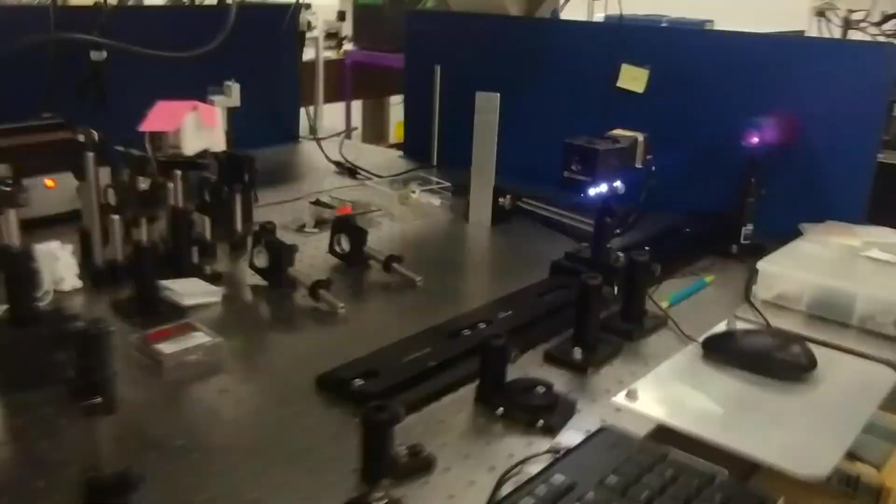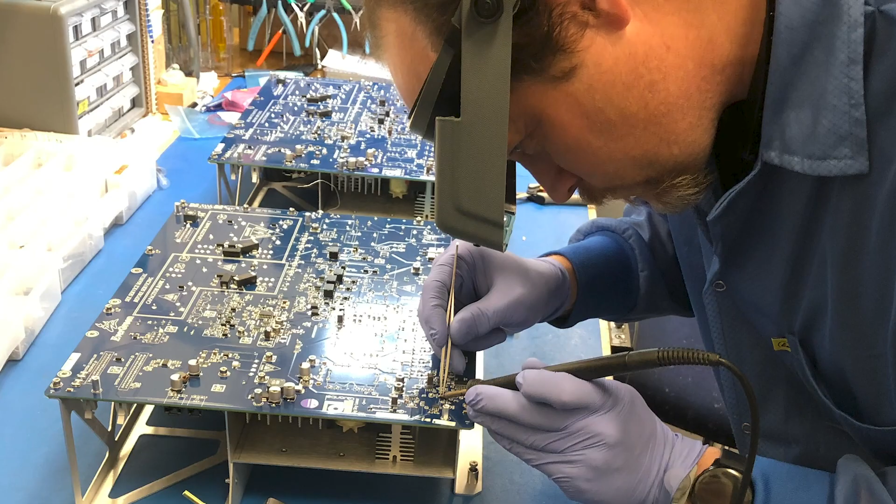I'm Jeremie Waller, senior electrical engineer at Quantel Laser in Bozeman, Montana, part of a global company called Lumibird with many design centers around the world. There are 18 mechanical engineers and about 22 electrical engineers in Lumibird that are part of the Altium 365 environment. It's pretty easy with Altium 365 to expand our environment. We research, develop, and manufacture solid-state laser systems for medical, scientific and defense-related industries.

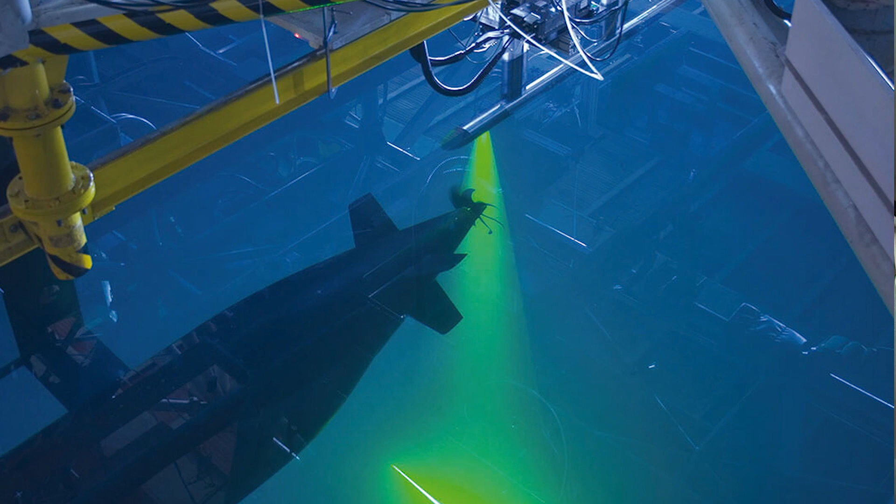Our mantra, I guess, would be we're rugged, reliable laser systems. I'm Laine McNeil, the senior mechanical engineer at Quantel USA. This is one of our newest, and it's a fairly high power, high rep rate laser system. It operates with diode pumped input, but it's water cooled.

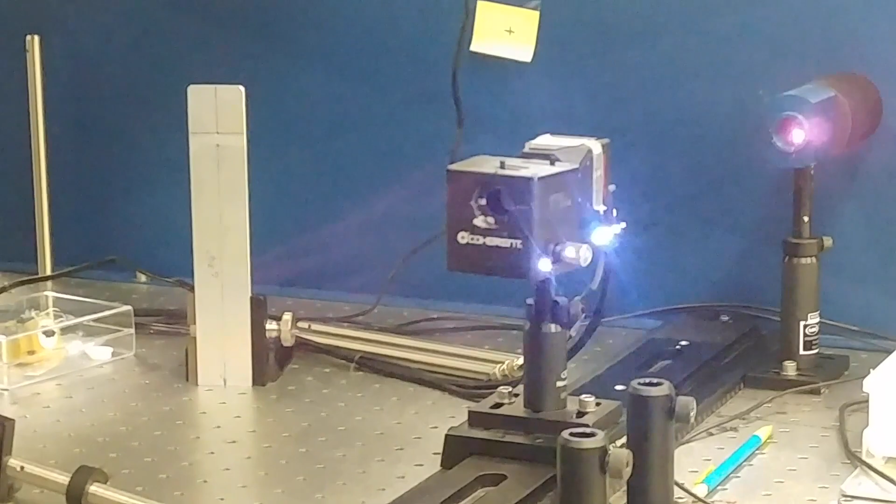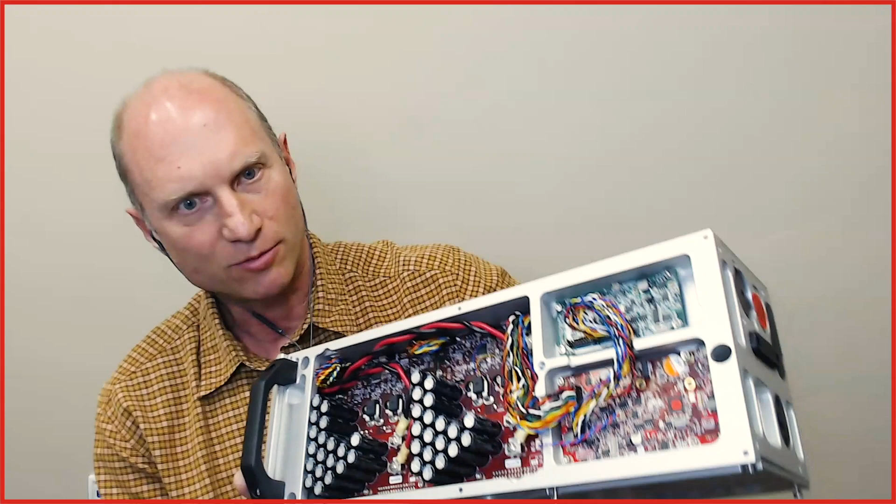The circuit board components of it, when we got going, we have some covers here that we put together, and they're kind of interesting. We have a number of circuit boards that sit inside the system. There are some fairly high power diode drivers that we use, coupled with some control electronics, and then we have some other electronics used for regulation of nonlinear crystals that we use to convert the laser output to different colors.

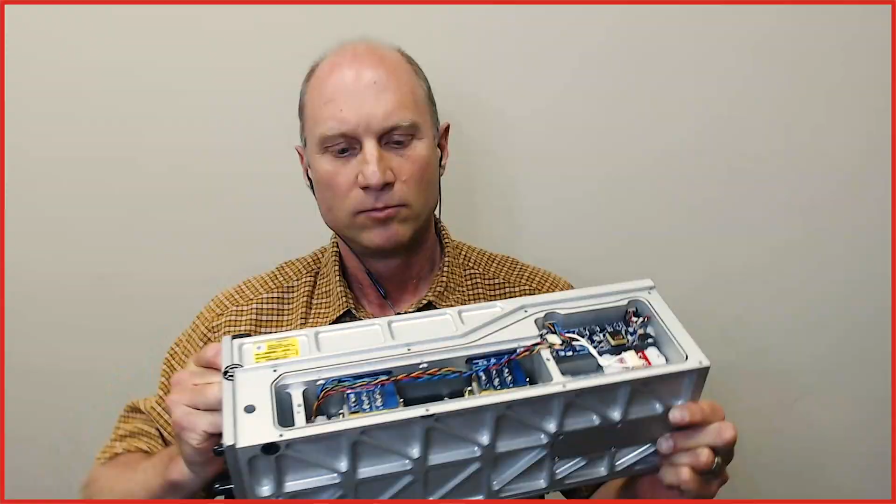Before we were using CoDesigner, basically we would get a DXF file. We would then take the components and we'd have to go ask them, okay, how tall are these components, and then we'd have to extrude the materials up to get an idea, because we have some very tight fit applications going on. So a collaboration tool like CoDesigner just really allows us to transfer back and forth easily. Not only does it help us design the space, but it makes for better assembly drawings so people can build and manufacture this, so it changes a lot of the picture here.

It's an amazing step forward now to be able to have all the exact physical geometry completely understood and known. Being able to see that allows us to prevent problems that we were having in the past.

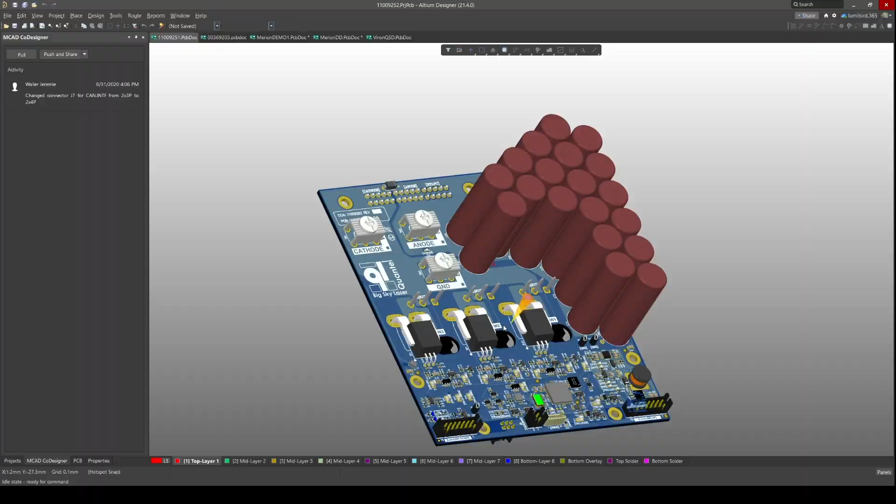We have an example here of one of our lasers that was a collaborative process using Altium CoDesigner and Solidworks. Having the collaboration tool like CoDesigner in there helped us with this board in this particular design. How did we get to this board, I guess, is a good example to go through.

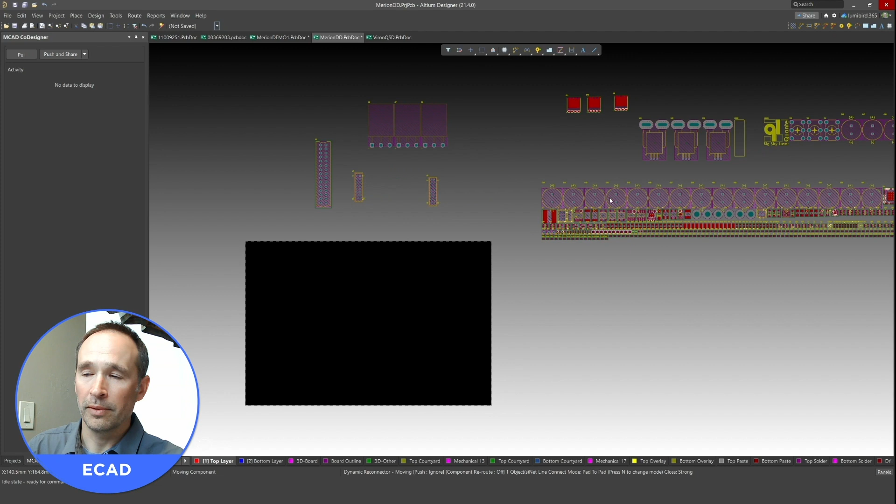This is how it starts a project usually. You just have a rat's nest of components, and in this case we'll just pull a few of the important ones that we need to find location on right away. Because I need to get Laine involved and give me a board shape that fits in the space, show me where the mounting holes are, and we just got to establish an area where we can do components.

So I'm just going to push it over to him for the first time so that Laine can receive it on his end, and he's going to do all the work for me, thankfully. It takes all the risk out of the process. Did you get that pushed, Jeremie? Yeah, it's got it pushed over to your direction, so I've got it in there. You can switch over to your screen.

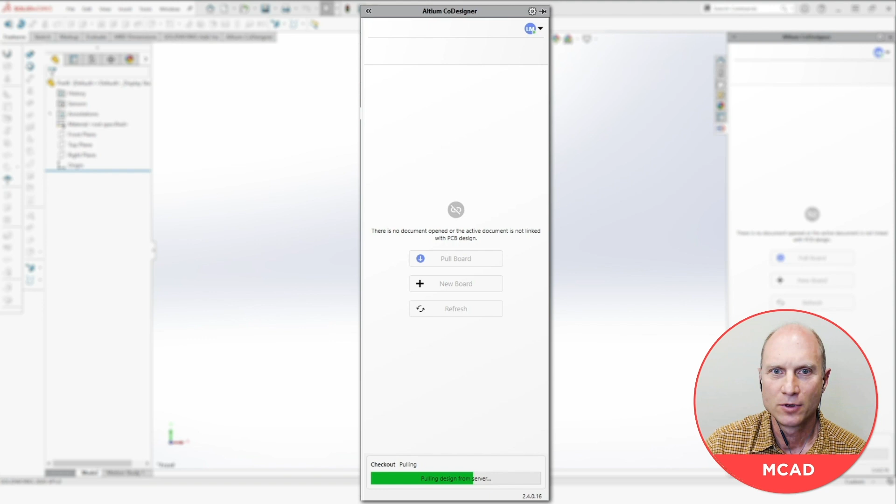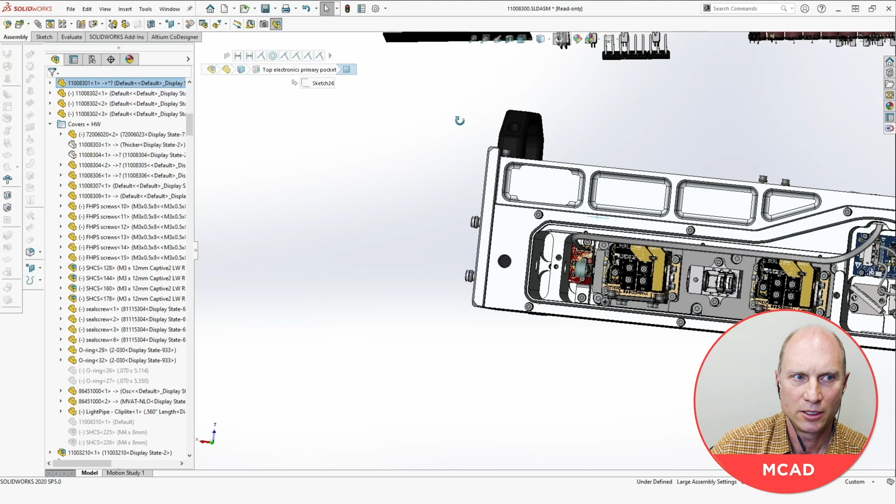Okay, so I'm pulling it in here. So basically one of the first things that comes in with these gives us the opportunity to come in here and define the physical size and shape of the component. So that is the physical size of the circuit board that we wanted to work with. And then basically what we're able to do, I can position the component.

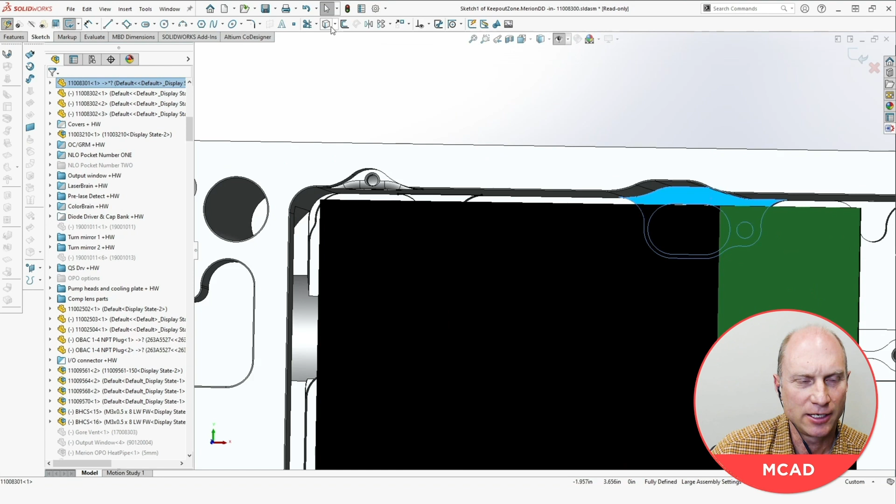So with that kind of placement, then I'm able to come in and add cutouts to the circuit board. But one of the things that we often do is we will go in and add a feature on the board that's going to define all the keep outs. So I'm just going to define a new part at the moment that I will define as the keep out zone.

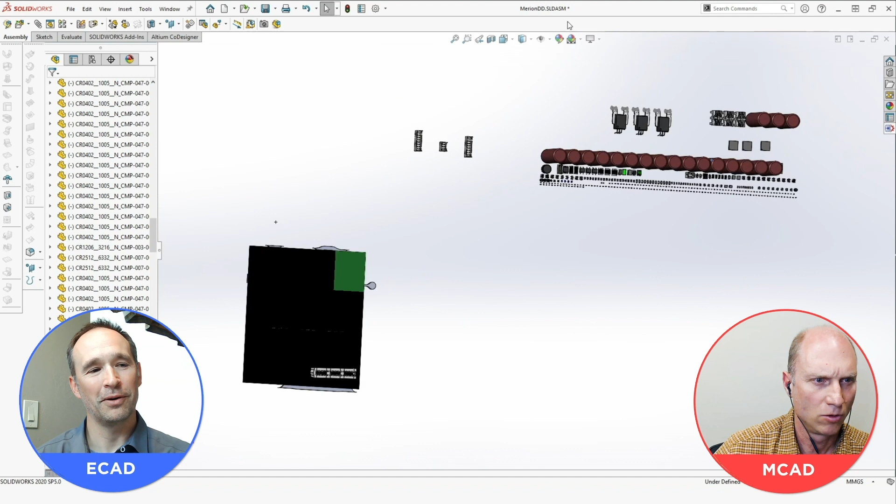These are the features that are difficult. They're pretty obscure, random shapes and everything. The thing is, this usually is a lot of back and forth, but since this is a board that we've already went through this process, what you're getting to see is like weeks worth of back and forth and arguing over shapes and space. But a lot of this information is going to show up in one shot and be pretty well done, so that Jeremie would be ready to work with it as soon as we're complete with this.

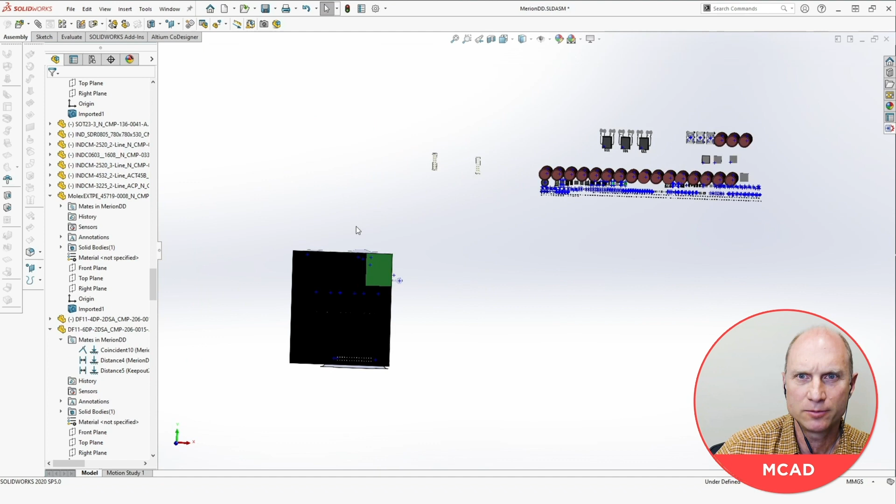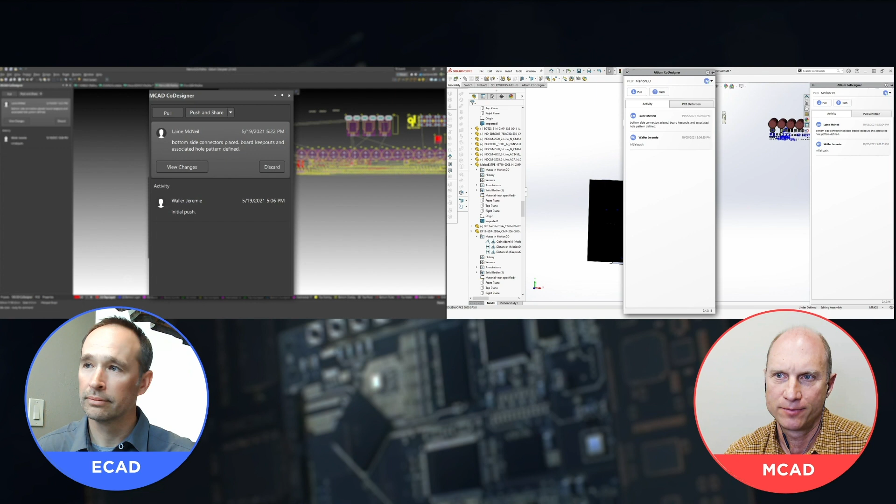Okay, so I just pushed it at this point. So what you're going to see is Jeremie will now have the opportunity to pull the system into Altium when the push is done. It's still in the process of collecting. There, it's done. It's already there. All right, so it is fast. I mean, this is great.

I would comment too, even when designs are pushed and updated overseas, our server's not even in this part of the country, so it's been really a good performing product.

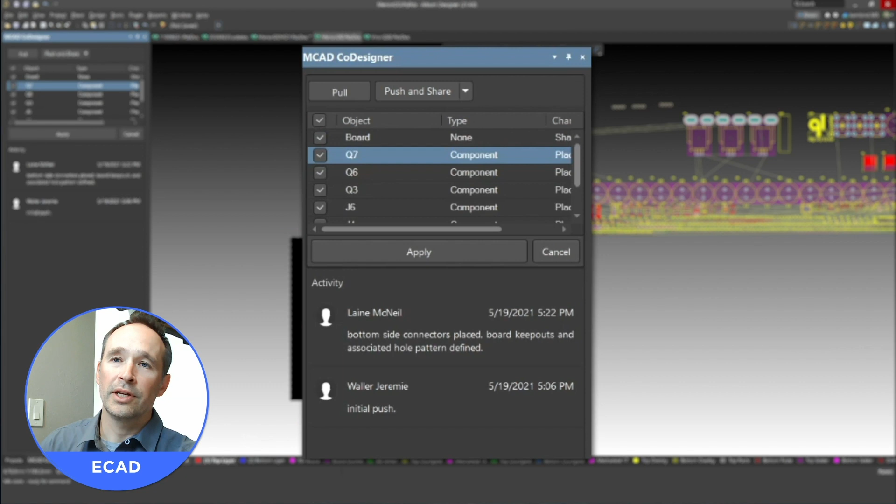But I want to view the changes, see what Laine did on occasion too. So it's going to give me a list of the preview of what he did. So if I like everything that I see, I can just hit apply, and it's going to pull everything in there. Okay, so here you go. Here's all the changes he made. It's got everything I need to get started for the most part.

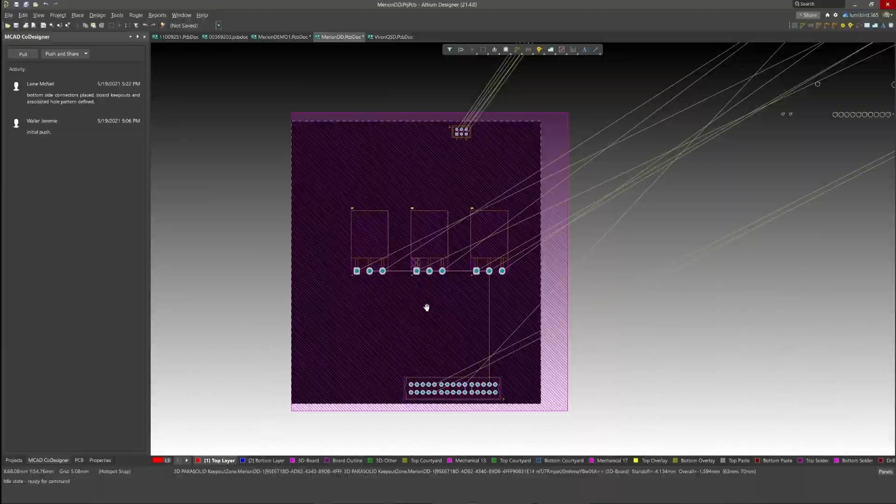It would be impossible for a single individual focused on designing electrical circuits to be able to also at the same time envision all the detailed mechanics, because they don't have access to that information. And so this allows the mechanical engineer to effectively assist the electrical engineer in basically properly positioning things to achieve the most compact or the most reliable connection without a bunch of iterative problem solving and back and forth mistakes and fixing.

I understand his challenges, he understands mine, and we work together to come up with a solution that works for both of us. And it's the thing that didn't happen in the past nearly as easily.

We're more competitive in the market now because we're able to get smaller. So now we're taking advantage of better PCB design technologies like micro vias and buried vias, and getting our circuit boards smaller and smaller. And at the same time, the space that we're working with in Laine's world is getting tighter and tighter. So it is definitely added to the quality and performance of our laser systems.

And so it's worth every bit of time invested in learning the tools to allow you to provide those better products for your customers.